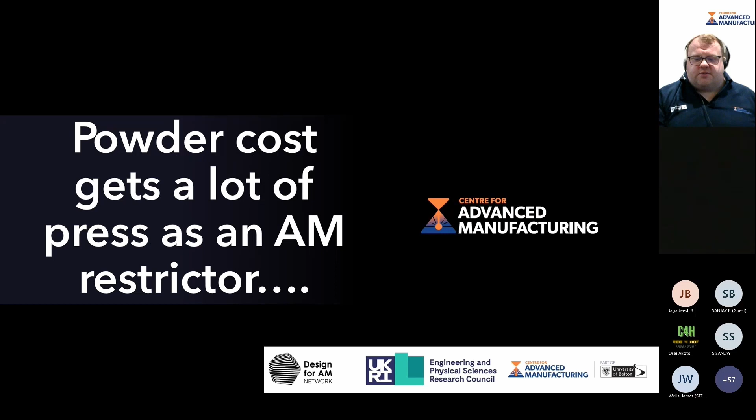So in additive manufacturing, powder bed in particular, powder cost gets a lot of press as a restrictor for additive, and it's not to say that that's not true. Any feedstock can be quite expensive, and the reality is for additive powder bed fusion in particular, high value manufacturing, does that mean that there's automatically a high cost of the final product and therefore high feedstock costs? I guess there's a little bit of that part of it.

We'll hear much more on feedstock tomorrow, but when we're making powder, atomizing powder, the yield which is of the highest value for us in laser powder bed fusion is minimal. Beyond that sweet spot, that laser powder bed cut, it's not always usable if it's a new material or a relatively niche material, like Scalmalloy, for example. There's not lots of use for the other sizes that are natural as part of the atomization process.

So if the laser powder bed cut gives us a best all-rounder, and it's popular because people want it, and people want it because the machine vendors tell us that's the powder to use, then it will make it expensive. Yes. Does that mean that large powder is not processable? Is it worth looking at? We decided to start some small exploration in this field.

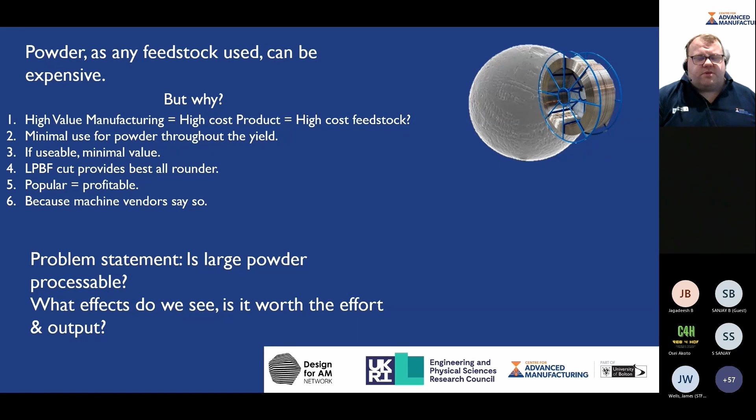The main reason for the project is the bigger picture: for some products like titanium, for example, there's maybe some really interesting opportunities. We did the project as a short run just with a 316 steel. So what we had was a standard 15 to 45 micron cut. We used our standard parameters, our Xact Metal XM200C, 30 micron layers, and we did, as I call it, a standard density cube build, the builds that you've probably seen hundreds of times.

Because of the nature of our investigation methods, we wanted to use PIP, which we've now heard lots about and hopefully understand. So we didn't need to do large full height builds. We could go for a short build, so we could do a quick turnaround time. I think it was about 2.5 hours for the build, about 25 minutes per coupon before we got some test data. We then also looked at a large and oversized cut, so a 45 to 150 micron cut.

And all we did for the quick experiment was we doubled the layer height, and then we calculated energy density to create a sweep of different opportunities. So, three powders. The 15 to 45, I think I explained that. The other two were an energy density sweep, and we're just looking for some correlation between energy density and mechanical performance, at 60 micron layers. What we tried to do was create a 50-50 blend, so 50% of the 15 to 45 plus 50% of the 45 to 150.

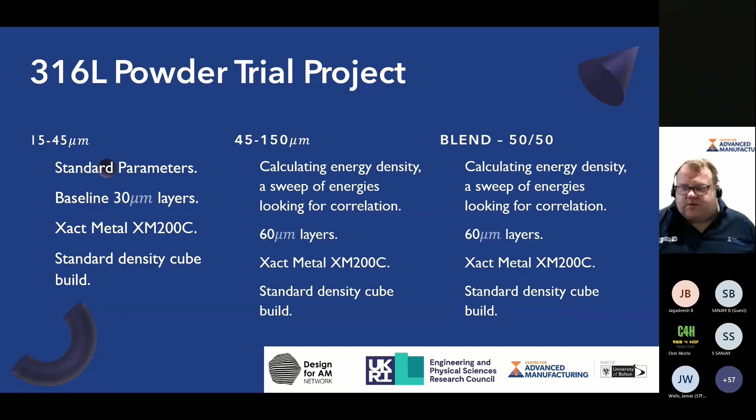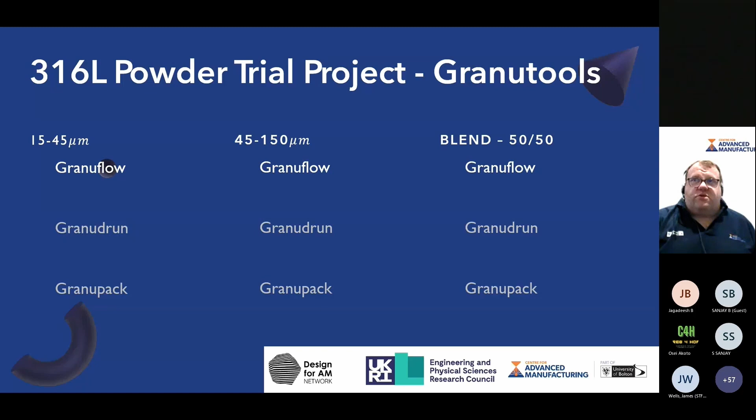Same builds in all cases, and it was a first dip check. This was only completed a few days ago, so there's still lots of work to be done. But in terms of our method of analysis, we have the Granutools equipment: GranuFlow, GranuDrum, GranuPack. So we started off running the GranuFlow with all three powders to look for the response. For those who haven't heard of them, the GranuFlow gives the flow rate, the GranuDrum the cohesive index, and the GranuPack the packing density. They provide nice data for comparisons out the back end.

It's a digital process, and as part of our plan at the Centre for Advanced Manufacturing, if we have our powders monitored pre and post build consistently, the value in the Granutools equipment is quite high in terms of giving us lots of data which will link cause and effect of failures in builds to what our powders are doing. Perhaps unsurprisingly, for anyone who's worked with metal powders before, the larger powder flowed much quicker.

In terms of the GranuFlow, we have multiple sizes of apertures, so it's the same test, just in different powder conditions. The blended powder was much slower and actually had, I guess, a worse fit in terms of following the trajectory expected. 15 to 45, relatively slow compared to the quick powder. It's not really too pioneering at that stage.

We then looked at the GranuDrum. So the GranuDrum, in this case, we looked at low speed performance at 2 up until 10 RPM, and then 10 on the way back down to 2. And what it actually will do is the drum will start to rotate, and it will measure the angle at which we start to see powder fall. So that's one of the initial parts.

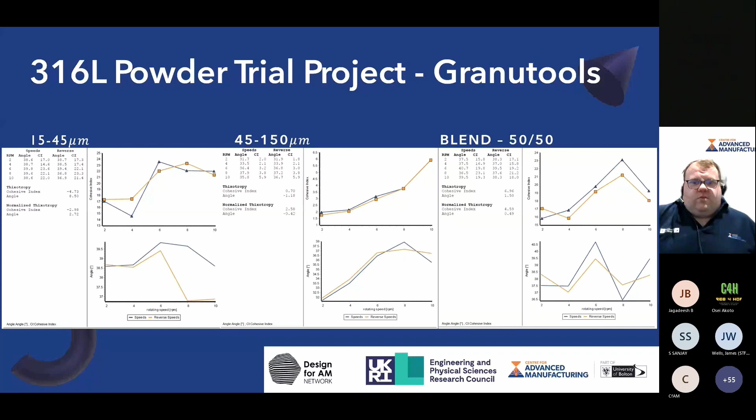Our calculation in the background will then give us a cohesivity index, and it will start to talk about whether the powder has behaviors, shear thinning, for example, where we start to see powder change with speed, whether we see any hysteresis, where we have different performance on the way up to on the way down. And again, perhaps unsurprisingly, we see a nice clean graph on the large powder. Powder dynamics of large powder is expected to be a little bit better, I would say.

If we just zoom in, what we see in terms of the 15 to 45 microns is quite an interesting powder, which actually certainly starts to show some potential shear thinning when the speed starts to increase, and the reality is the next stage of this powder test should be to test at a higher speed, more indicative of what we will see a recoater kind of acting on a powder. We also see some differences between the speeds on the way up to the reverse speeds. Quite a sticky powder, I would say, quite surprisingly.

Our Scalmalloy tests recently were very, very sticky, and that shows quite clearly in terms of the large powder. Relatively predictable, let's say. So predictability is a nice word to be able to use with metal AM. The blended powder has the best of both worlds. There's some predictability, but some quite strange behavior in terms of the way that the powder was starting to act as the speeds increased up towards 10 RPM.

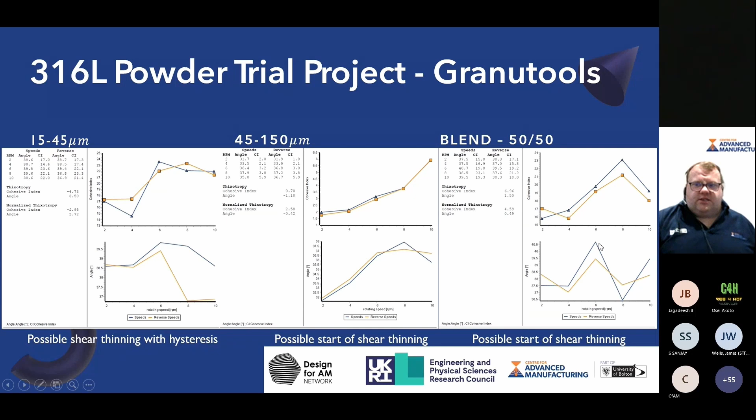What does that mean? It means that larger powder is having an effect on flowability, but it also means that the blend is potentially starting to become less cohesive and therefore easier flowing at higher speeds. Again, there's an additional test to be done here, maybe looking at up to 20 RPM. So if we start to look in all cases, there certainly seems to be a potential start of some shear thinning. We can see that from the way that the graphs are all starting to try and turn down, and in this case, this is slightly distorted.

What the GranuDrum looks like, so the top image in all three cases is the after initial settle. So you load the powder, the machine will then do an initial calibration and create its horizontal level before it then starts to rotate. And at the end of its rotation up to 10 RPM and then back down to 2, it will then go back to this horizontal position. And what we can see is an idea of whether the powder's sitting as you'd kind of expect, I guess.

So again, the large powder mounded in the center, and then at the end, relatively flat. The 15 to 45 shows there certainly is some cohesivity. There's something causing some kind of clumping, and then the 50-50 blend kind of in between the two. Again, it's an informative data point in what we'd expect to see with powders.

And then finally, for the GranuPack packing density, what we actually see is the peak, which again we potentially need to go back and do some more packing. It looks like the trajectory is showing it's not quite flattened out yet, so we're ready for potentially a little bit more packing. The 15 to 45 gives us 5.11 grams per milliliter. The 45 to 150, the largest powder, had the lowest packing capability.

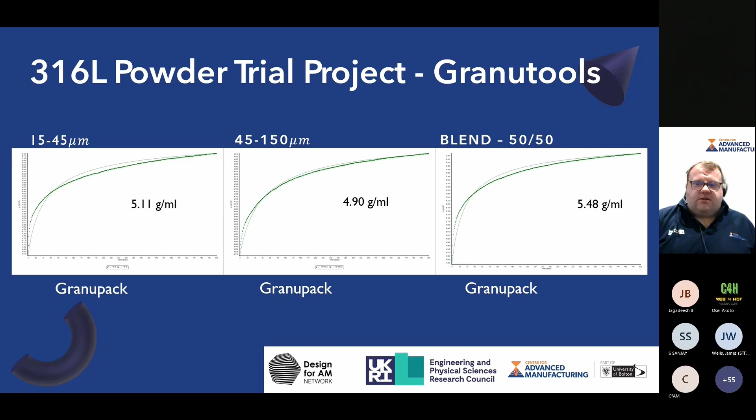The blend gave us the best overall because there was such a large variety of powder sizes in there. So 15 to 45 was slower flowing than the 45 to 150, with the 50-50 being the median.

Expected outputs, I would say, but there were some interesting opportunities, I think, in terms of the packing of the blended powder, which would give us some confidence that a nice packing would give us a nice powder bed, and if we get the parameters right, we would therefore have a relatively high density part at the end.

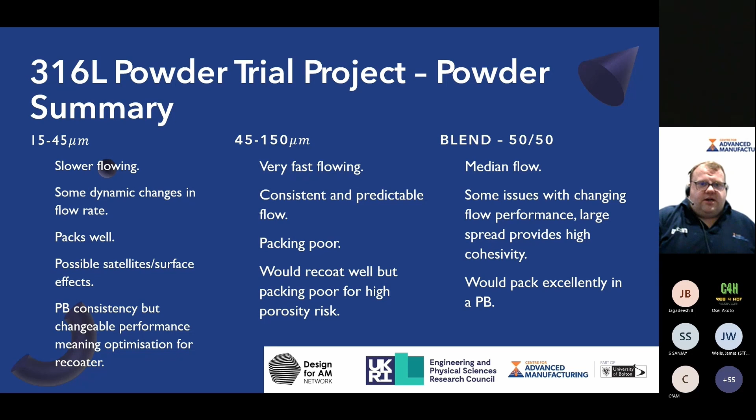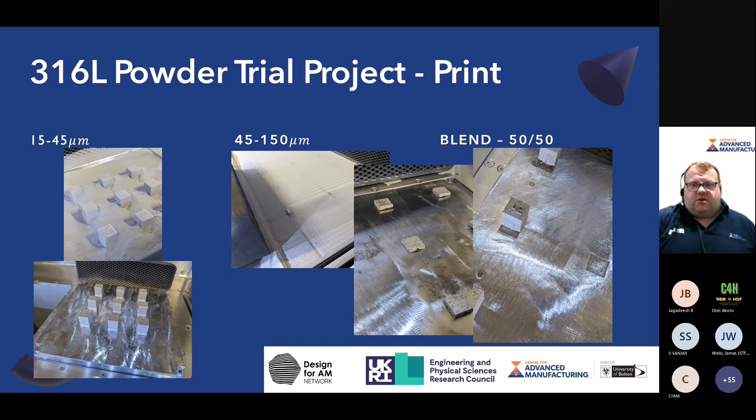So we ran through the powder trials, and then we went into print, so the density cubes, as you'd expect, the 15 to 45 on the left. The 45 to 150, we had some issues with the support parameters, so we ended up going down the route of printing a column at a time just to stop us having distortions in the powder bed. And then we went through the process of creating a quick baseline.

So the baseline we chose was a 316L from ASM, less than 217 hardness, 40% elongation, and then a 170 to 485 yield and ultimate tensile strength. In terms of the powders, relatively surprising that we were varying the energy density by changing the hatch distance and scan speed, and across the board there seemed to be some relatively okay looking results.

I ordered a balance to do density measurements in July, but it still hasn't arrived, so we haven't been able to add that data to this yet. But in terms of an initial check using PIP, we managed to quickly take coupons. We tested them in the XZ plane after a quick skim and polish.

Had a couple of gaps because of some issues in terms of how flat the coupons were in the end. I think we maybe were a bit overzealous on the polishing, and we didn't have the squareness that we'd need to get those data points. But generally speaking, there seems to be some performance consistency between our 15 to 45 trial and our 50-50 and our 45-150.

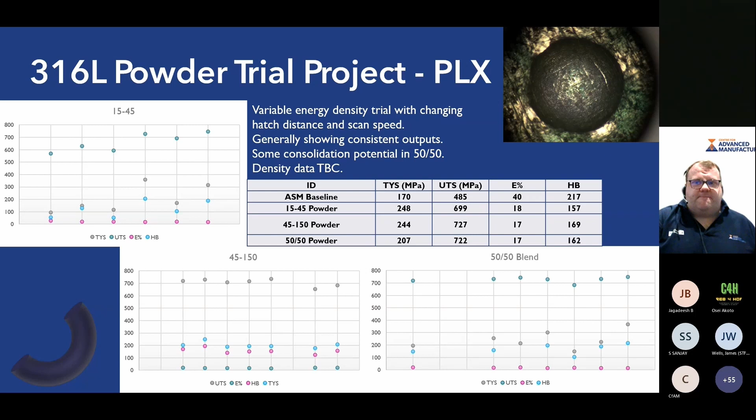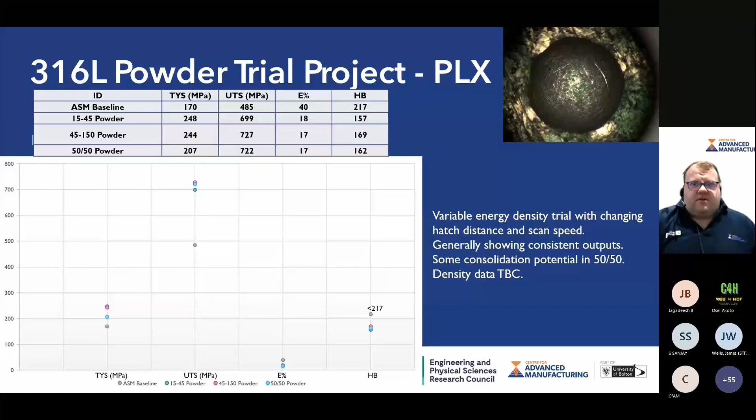Accumulating that together, the variable energy density trials looked like there was some consistency, as I mentioned. In the vast majority of cases, we were exceeding the ASM baseline, pre-heat treat, etc. But ultimately, it gave us a bit of a positive first trial. So go back to those initial questions. That problem statement: is large powder processable? And what effects will it see?

Well, is it processable? It absolutely seems to be. We didn't need to go to a 6 to 9 month parameter trial. This was a few days work, with which we managed to produce some meaningful data. Would we want to? I don't see why not. Geometric performance seems to be acceptable. Density cubes only. Surface condition is a function of design requirement.

So if you need an optimal surface finish, then maybe you would choose a different powder size. But if that isn't part of your parameterization, or if it isn't part of your need, for example, if a part will be machined all over, then maybe we do have alternative options to start to build this data set on using different size powders. Mechanical performance is a promising start. There's certainly lots of data missing that we need to add over the next few months of 2023.

The time in process is a small change in our machine, but if you were on a much larger machine with much larger layers, there is certainly a deposition rate benefit, I would say. In terms of cost, quite a few words there, but the hard hitting answer is titanium in laser powder bed cut versus an oversized titanium. I've only got one quote, but I got one quote to do a quick check, and the oversized titanium was a fifth of the price.

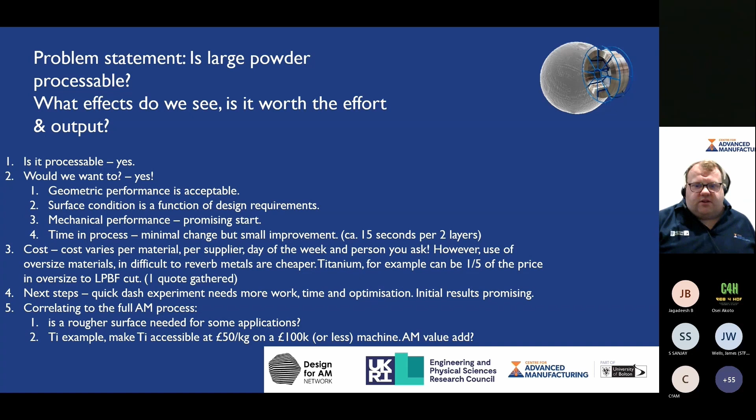Accessibility of AM is really important. We mentioned that at the start. So this is one of the areas that we've been looking at in terms of large powders.

The second trial that I'm quickly going to go through is our wire arc additive trial. We looked at a couple of geometries, a couple of angles and shapes, and the idea was that these would be converted into a combination of some PIP coupons as well as some tensile standard ASTM E8 coupons, thin wall, thick wall, different geometries, and we wanted to then do some cut-ups and do some initial trials.

Unfortunately, the build had to be stopped relatively early, so we didn't get the Z height that we needed to be able to do the ASTM-E8 type coupons. But in the art of making sure that we had data ready for today, we went on and we did a PIP overview.

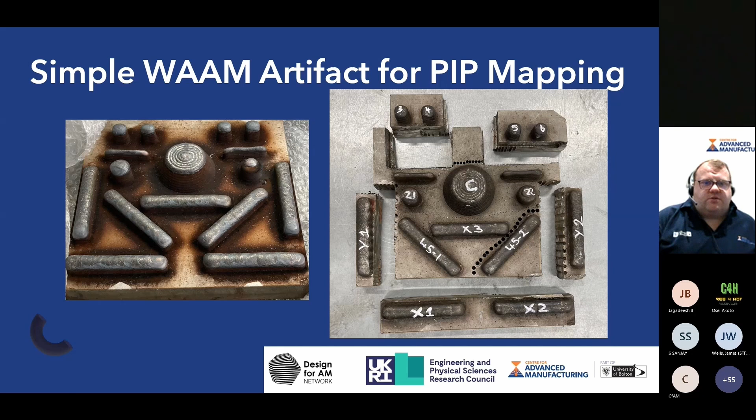So focusing on the cone and this section at the top, these were meant to be cylindrical Z height tensile coupons. We managed to make some small fractions. So taking a cut as per the dashed lines gave us something that looked a little bit like this. We tested twice in the substrate, twice at the interface between substrate and the first weld, and then using PIP, though it isn't 100% precise, we tried our damnedest. With WAAM, it's much easier to do it than it would be with laser powder bed, to try and test the interface or the weld interface and also test the bulk material.

So we managed to try and get some data to look at the substrate versus the interface between substrate and welds, and weld one, if you like, the bulk material, and then the interface. So again, looking at the weld performance. And the idea is with WAAM that the interface should be as strong or potentially stronger than the bulk material. The use of the substrate is a key part of minimizing material waste. So again, we should have similar performance.

In the case of the large cylindrical part, quite a lot of distortion on the build plate. It was an inch thick substrate as well, and we still had some significant distortion. Though I do believe that the organisation who helped us out with this did find that there were a couple of parameter issues in that part in the end. But we did see quite severe anisotropic performance in those interfaces in particular.

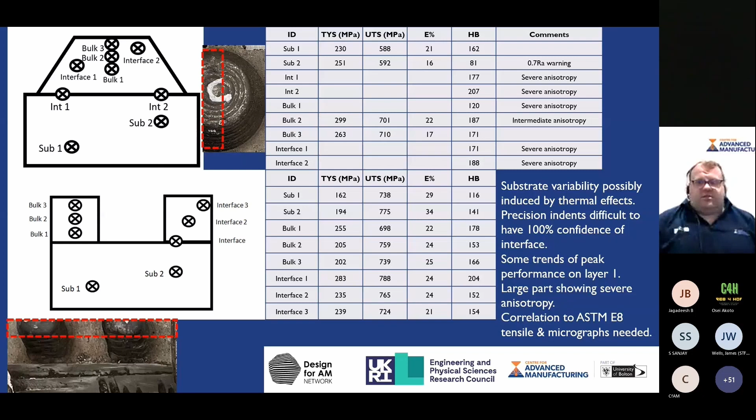Performance was quite good, I would say, quite consistent in many areas to what we would expect to have seen from the laser powder bed. So there was nothing too alarming, but there was quite a lot of variability in hardness. And again, there was always a chance that that's down to the coupon itself. Maybe a heat affected zone from wire EDM wasn't quite removed. Certainly some additional work to be done. We only managed to get the data fully completed just yesterday, so this is one to be continued into January as we do a little bit more exploration into that field.

Okay, I am relatively on time considering the drop-offs, and I know there's a lot of information in a short amount of time. Does anyone have any questions?

A joint program to develop a standard. Yeah, I think the Granutools equipment is a really interesting set of equipment for me, and I think there's certainly some interesting opportunities to look at a more standardized approach to testing by using that equipment. The dynamic powder analysis I think is really powerful, thinking about how we analyze our powders in a method which is more indicative of how they would behave if they were put through our additive machine.

So the dynamics of the drum in particular, the flow, I'm really confident that as we build up our data and our understanding and the full process monitoring of powder pre and post build, the build success, the potential opportunity for us to do some in-process monitoring, etc., I think there'll be quite a compelling case for how powerful that software will be and the reporting of the outputs of the Granutools equipment. So I certainly believe that's the case.